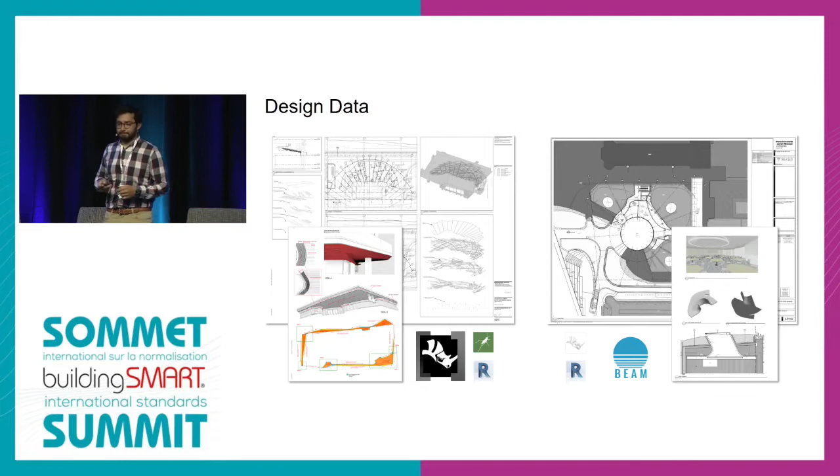But once we have all this data into the project, one of the main things is understanding that the data is going to be usable to the client at the end of the day.

We can do a lot of our data, as Claudia mentioned. We do specify which parameters or which information the client is looking for, but a lot of times the design team is not 100% on top of that information. So we need to make sure that the family we are using has the correct information that the client is looking for.

So we develop multiple dashboards that actually leverage data extraction from Revit using Dynamo, Clarity, and some other automation tools to actually create and give us a visual of how complete our data is and how we are actually following the requirements in that sense.

So we can use this information, provide the design team with that, and say, okay, let's start focusing on these items to make sure we are following the requirements.

And more and more we are getting into clash detections during the design phase. It's just a good way of understanding how our geometry itself is providing better information for the construction team once we issue our models for construction.

So a lot of times when we get into the more developed facility management projects, they actually require us to be completely working with the CMs during design and transferring over during construction, so we minimize as much as possible the loss of data that is going to be happening during that phase.

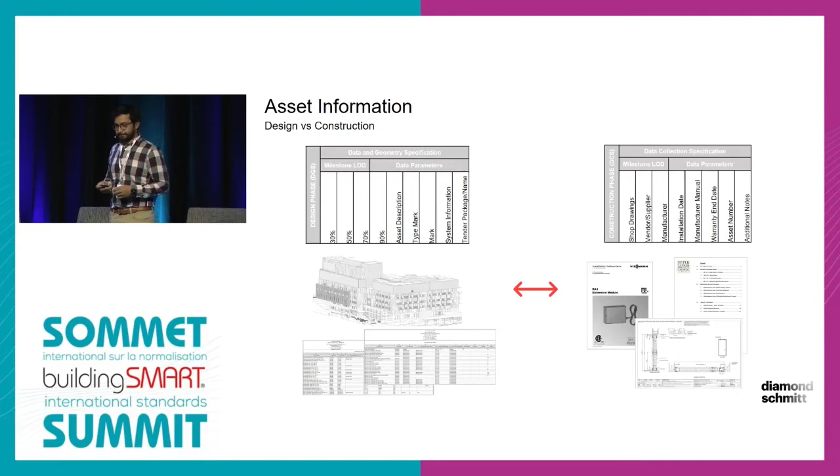At the end of the day, we always have the project closeout, which is when we get into the handover of the data itself. That's going to be different file types. Some clients will ask you to deliver in COBie. Some clients will ask you to just provide the model itself. Sometimes it's the actual Revit, as they use that platform themselves.

But at this point, we haven't seen a lot on the openBIM aspects when it gets into facility management from the client side for their own use. We don't have a common data environment in that sense from the client, and I think that's the part that makes it a little trickier when we're transferring over the information to the client. So I'll pass it over to Claudia again.

So we just thought we'd offer some summaries. Alignment is still required with the procurement phase. We find that's an area in our case studies, but also in other projects, where we're seeing a lot of discrepancy with the framework outlined in ISO 19650.

We're also seeing that, although our post-BEP is something we always do regardless of any requirements and requests from the client, there's still a kind of disconnect between the contracts and the BIM execution plan, the post-BEP, both in when they're signed and who's signing them and writing them. That's an area we commonly see, again, beyond the case studies shown here. That's another takeaway we've noticed.

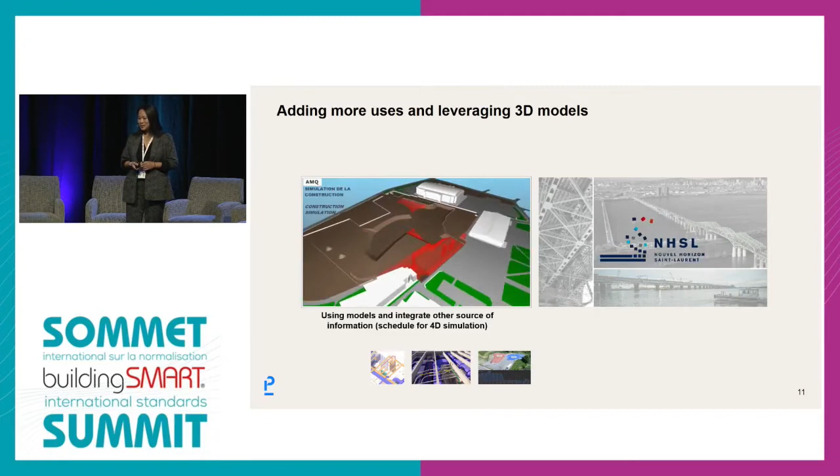And then later on, we also started to use more information, integrated scheduling. You all know what 4D simulations are. The first one would be back in 2014 and 15 with our project in Quebec City, and then lately we also used 4D simulations.

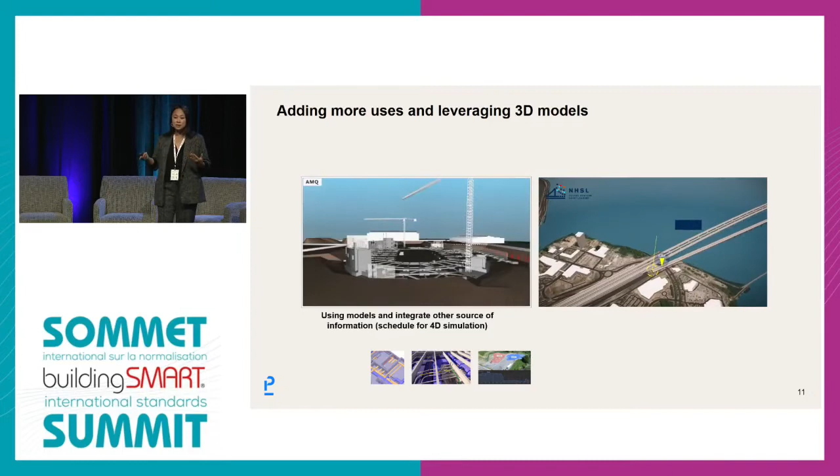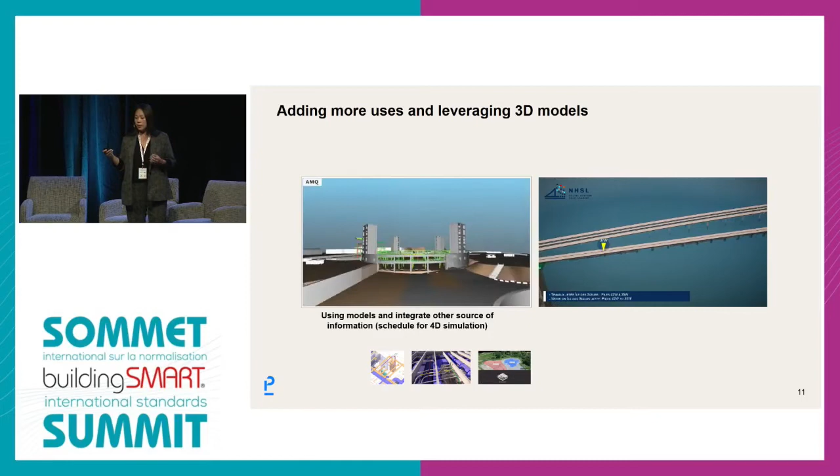But on top of that, we added explaining different methods to deconstruct. So this is an example of deconstruction. We needed models, we needed information to plan the deconstruction, but also to plan for sustainable development, and then to be able to...

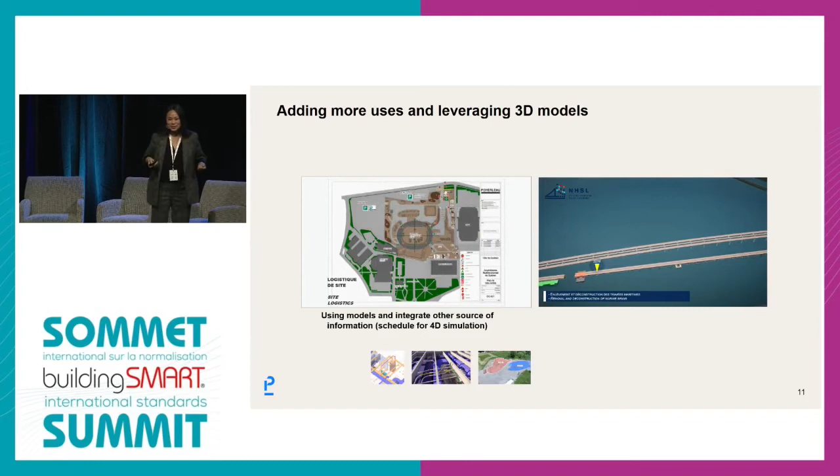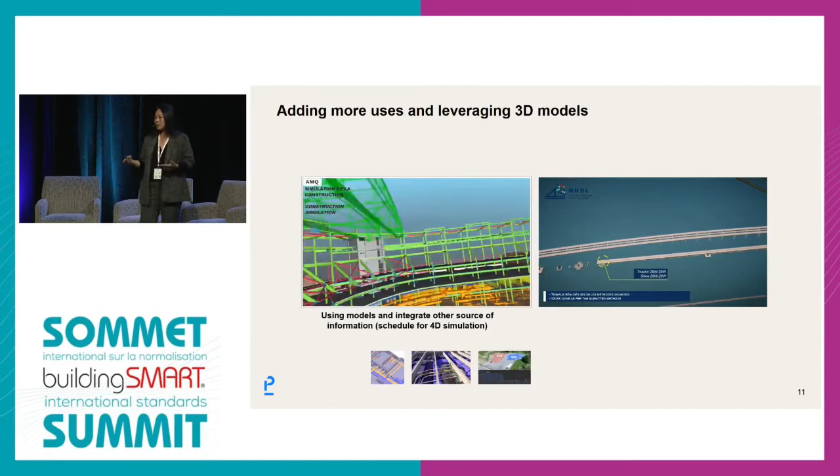Conserve. So preserve some pieces of the bridge for R&D, and then for other partners that would need to keep it, and then also to preserve it as a work of art a little bit everywhere throughout the country.

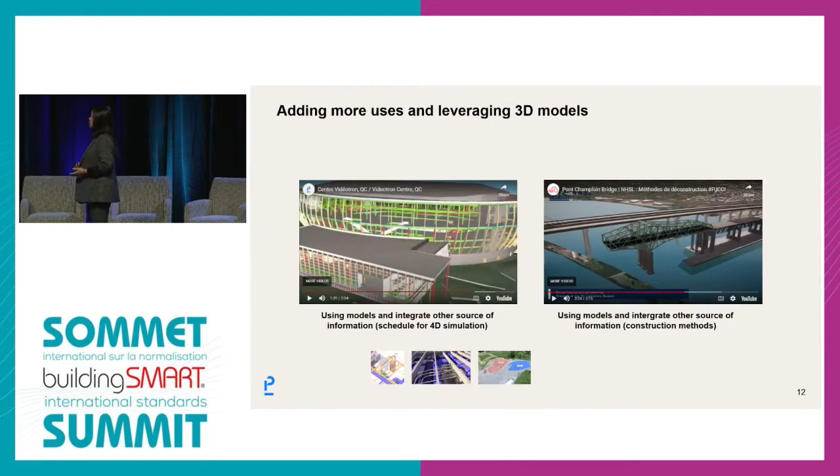And then while we've been adding all these uses for our projects, we also added different functions, different functionalities, the use of the 3D models for specific needs on specific projects. So we did automation to check the conformity, the compliance with the client requirements, of course 5D quantity extraction, and also transfer the information to the operations.

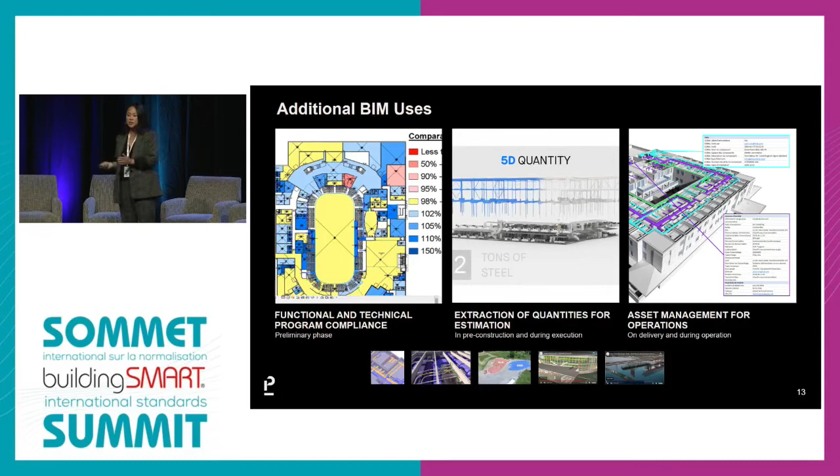So all of these different uses, we did it specific on projects, but it wasn't very integrated, because it was per project, and some projects would have all of the uses, while other projects would just have 1 or 2 uses.

So we did progress throughout all the life cycle of the project, using different types of information throughout different phases. And the most important throughout that is the information management, to be able to take all the information from different partners, our partners in architecture, our partners in engineering - it needs to have interoperability. I hope you understood it in English.

Interoperability. With this BIM approach, we don't work alone. We work with our partners, our engineers, our trades, and the architects. What happened is that we also worked with our data, and the sharing of data was very limited. The main goal is to be able to work on the same source of information.

That's why we started to get inspired and use ISO 19650, because it's very logical for the BIM approach to make sure you understand what is required to produce the information when it's required, and who is going to use it. We want to make sure that the information in production, all the data, is used and useful, and our colleagues later in the life cycle will be able to use it.

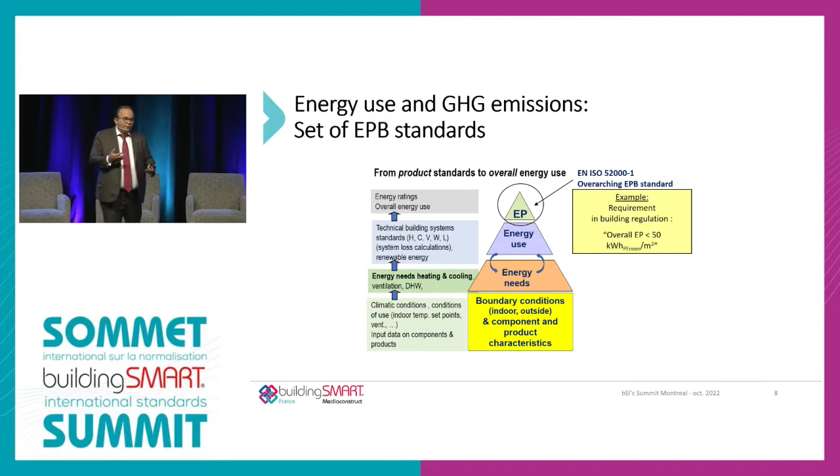From this point, what I'm saying is that we use the ISO 52000, that I'm inviting you to look into. It's an extremely important documentation that speaks of passing from the product to the system. And from that, I mean a normalized system, whether it be the works that were conducted. And the directive within eco-design is that we're not just giving a certificate on the performance of a product, but we're now going to give a certificate of performance on a component within a system.

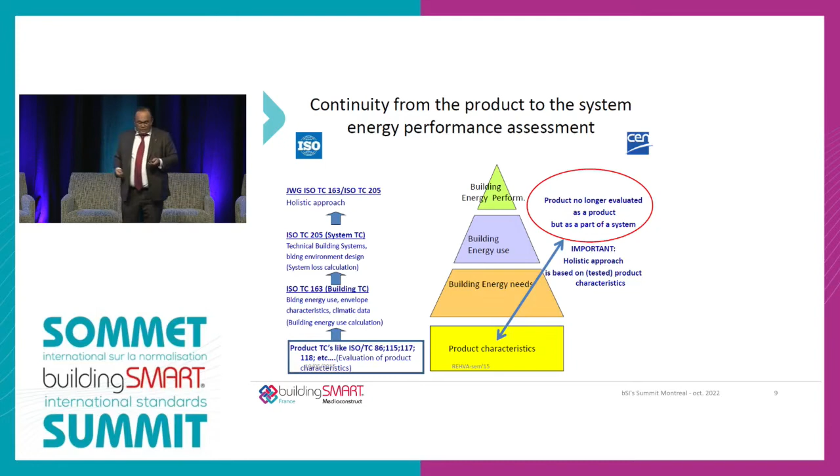And if we're talking about, for example, heating and ventilation, if you take a treatment or air treatment or filter system, it's not just an intrinsic type of performance. No, now it's associated to a degeneration process from cold and hot and through a life cycle. It's entirely more complex. It's based on much more dynamic calculations that bring about a higher level of complexity of management. And obviously, when you need to combine that with information or software that needs to read and understand that kind of information, well, obviously it adds incredible levels of complexity.

And on top of that, all of these databases need to speak with other very complex databases. And until now, we would have absolutely needed some kind of software to work in a fluid manner, because once again, the objective is that we're trying to create the bridges necessary for these systems to communicate.

So we find ourselves with enormous amounts of databases, and after that, a lot of requirements for information on the transaction, the management, the responsibilization, the reporting on greenhouse gases, which is now mandatory in Europe. And so what we said to ourselves is that we'll use environmental certifications to help us create a standard.

Nope, that's not going to happen, because the environmental certifications are based on averages and not performance based, and each certification has a different yield based on various indicators. For example, the various levels.

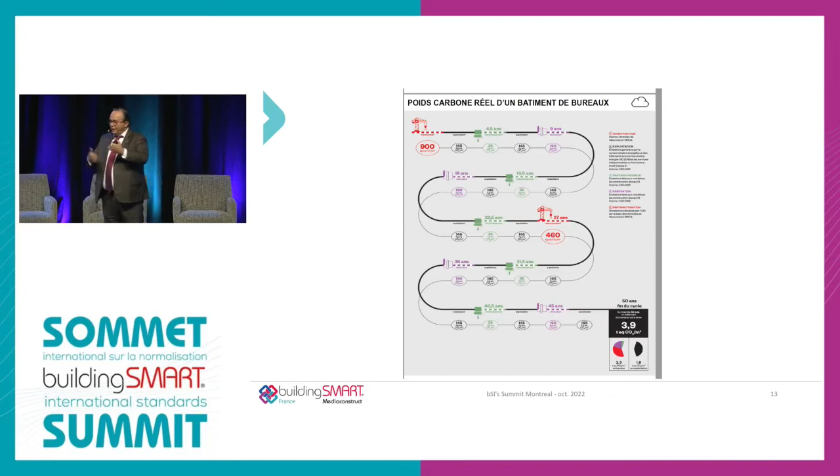So the various systems, based on the requirements, have different weights and will measure things differently according to weight. Now, all these elements put together, when we look at France and its carbon emissions and carbon footprint, if we look at it from a life cycle point of view, we're thinking every time you use something or you replace a piece, you arrive at the carbon point after 50 years, and we can express how much carbon will be delivered or created from this.

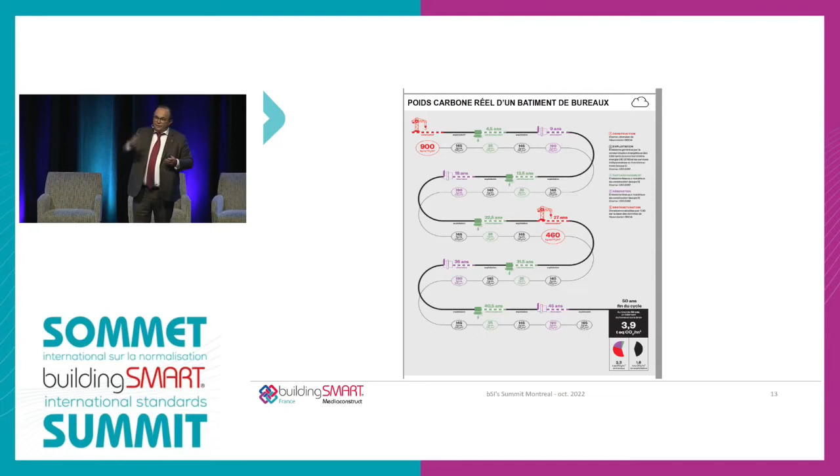So it's quite interesting when we look at it from the construction point of view. We're not allowed 900 kilograms anymore. We're not allowed to go over 460 kilograms now. So we're already creating limitations on performances for construction. And this is something that I was very pleased to participate in.

But if we were to implement or put in place a building passport in its entirety, with the entire life cycle on a 50-year period, and each year you could see what has actually been consumed by carbon, by the products of construction or the materials of construction, and then electricity, etc., all the daily consumptions, which would allow then to have a comparable for interior quality when we speak of one building next to another.

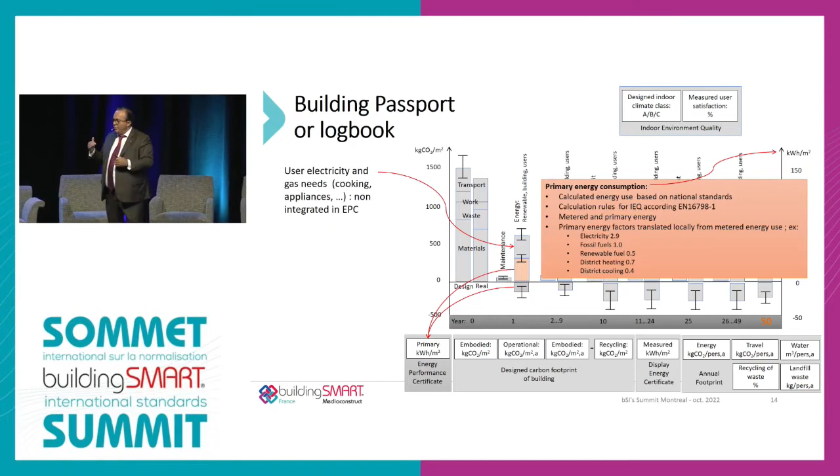Or to compare them just because of the... based on the volume that you're going to emit, you'll be able, in fact, with these kinds of statistics, to compare a comfortable building to a much more comfortable building.

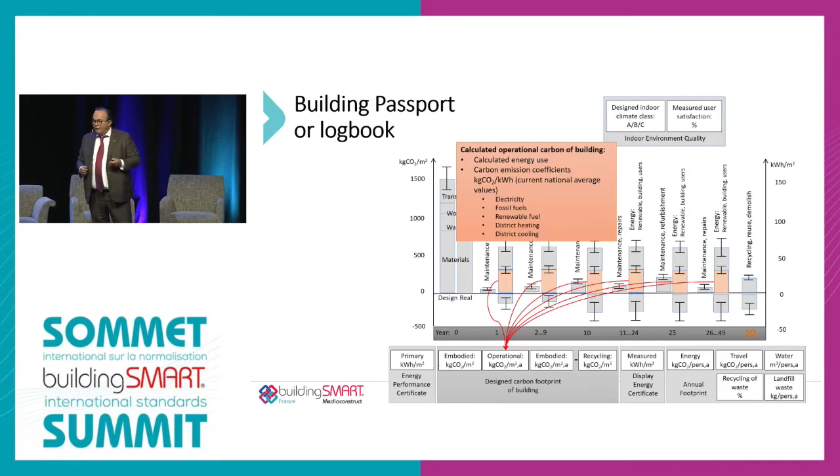So with this, we're able now to measure carbon emissions or carbon consumption, and with these other forms, we can now work on the reutilization or recycling. We also have a capacity to verify uncertainties or anomalies, and with these types of ideas or forms, we can have a unified document for all buildings that allows us to provide specific information from each building.

Now that this has all been said, we can obviously see that the progress of information, since the industrial components and their integration in a building and the life cycle of those components, how this building reacts to the climate, how will it react to use or to wear and tear, how much it will need to maintain, etc.

And from there, we find ourselves once again having to address colossal amounts of data with a dynamic vision, which is practically impossible to just take a picture and say, that's it, I'm done, I've finished my lifecycle exercise. No, these things are always moving.

It's forever evolving, so we have to manage the information in a permanent manner based on various moments of the year, and obviously there will be an evolution through years because of climate change, etc. So once again, we need to be able to acquire and collect this data on the performance of the products you have used, across various databases, completely fragmented.

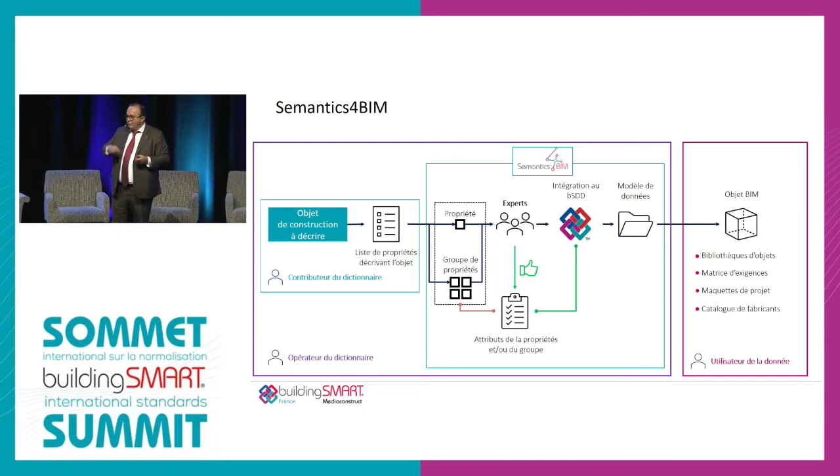Now, one of the works that we really reflected on for buildingSMART is we asked ourselves, how can we really start from the heart of the databases and attach to that, databases that are part of other databases that are non-interoperable and non-structured, but we nonetheless have to hook it on and off and attach it to other components.

So the idea is to be able to, and you'll be able to, of course, if you're interested in this development, give a tool that will allow us to do this interconnectivity work with databases, because we will not carry, in a building database, all of the information that is completely spread out at the industrial level, with managers, etc.

So the issue at this point is, quite interesting I must say, do we try to assume and collect all the databases, or do we try to just accept the fact that we are not going to be so interconnected, and how, of course, can we secure or bring a safety net to these exchanges of databases?

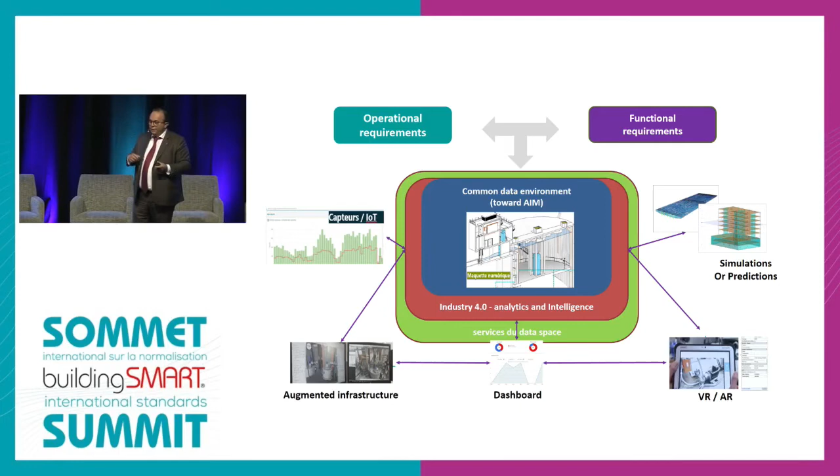This is where we stand. Obviously we're reflecting on the databases that should be common so that we can report on control and command, and sensors and the management of assets to do simulations. All this, you know this more than me.

The final idea is to have sustainable data analytics, structured so we can offer them to banks and investors who increasingly ask us to demonstrate the level of performance of our buildings. There used to be a day, blessed by the gods, where all we had to say was my building is green because I put a vegan shop there and a little bike stand. It's not like that anymore. We have to structure the information so that it's not questionable, and that it's legitimate, transparent, and truthful.

So once again, to conclude, I think we really do have some work to do together on the transparency of this information, how we foster it, and how we can do it for viable investors, and how to present it all. Thank you.

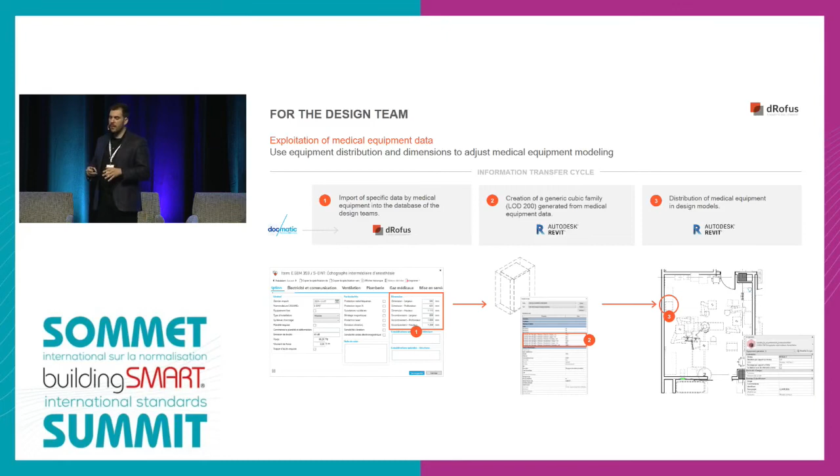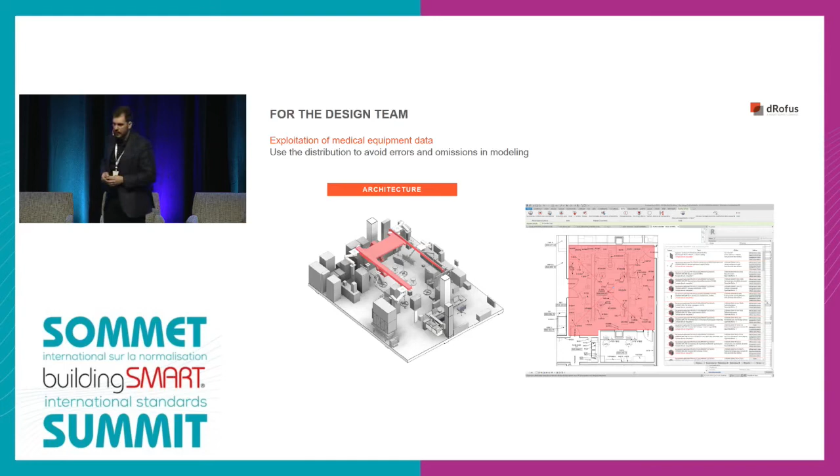And that's exactly when we have this information centralized and not dispersed, that we are able to produce well. We know the story - when someone's gone, someone cannot put an input, we are not sure of anything. So one of the important things to attach to our tool is that we were able to do a quality control in its whole, and that helped us avoid a lot of mistakes, because every single mistake was extremely important.

Another example I want to show you in the use of this data, an information that's very important is the parameters of incidence - it has to do with costs and production. I'll give you an example of IRM. It's big, it's expensive, and it's very complex. So it allowed us to isolate very quickly this kind of equipment.

When it comes to the incidence phase, in terms of engineering, they isolated the critical equipment in order to identify which ones were the heaviest so they could calculate the weight. We were able to use this data at different levels with different options as well.

Another side is we find the engineering in the electromechanics. They took the distribution of the equipment. They were able to see how long it was going to take, what it would take to operate it, and that would ensure them that they were able to calculate costs and time.

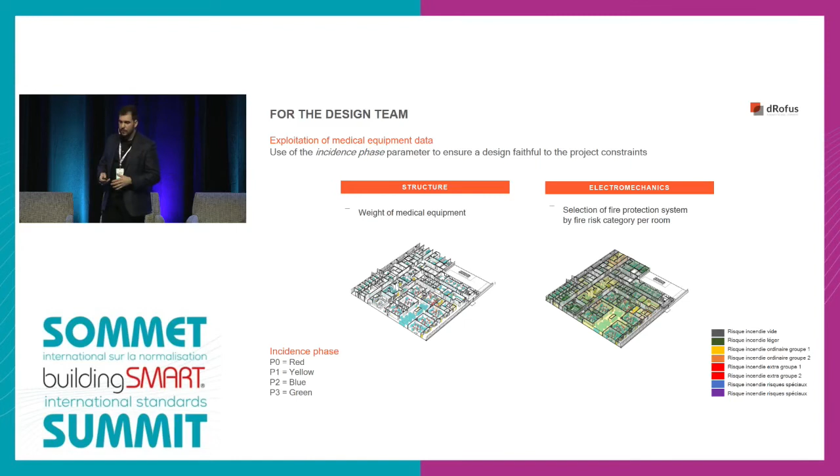So, for example, we will be able to analyze whether or not we put the fire down with water or anything else. We were able to make these engineering choices very quickly. There are other examples that I want to give you, but we have about 2 minutes, so we want to pass to lessons learned.

We have a few lessons learned that we want to share with you. The first, we learned it the hard way. We had to respect the technical choices. It was a very big lesson learned at first because we wanted to impose our platform. It didn't even take a week - it took a few weeks, it took a couple of months until we said, okay, it doesn't work, we really need to collaborate differently. When that happens, you have to make sure that the platform is up to par.

Because you cannot connect two things that don't connect. So the prerequisites were done and have to be done.

The second thing is that the data has to be exploitable, understandable. You have to understand the parameters. Yes or no - this language permitted us to understand each other. For example, when it comes to units, there isn't one vendor or constructor that uses the same basis. So we had to establish a common language in order to understand each other throughout the project, and that very enterprise helped us go very far.

Another element we want to highlight is something that helped us consolidate and take efficient decisions. So we got together - everybody had their version of Excel, everybody had the same Excel, but one had V1, V2, V3, V9... no it's me, no it's you. It allowed us through the platform to be able to